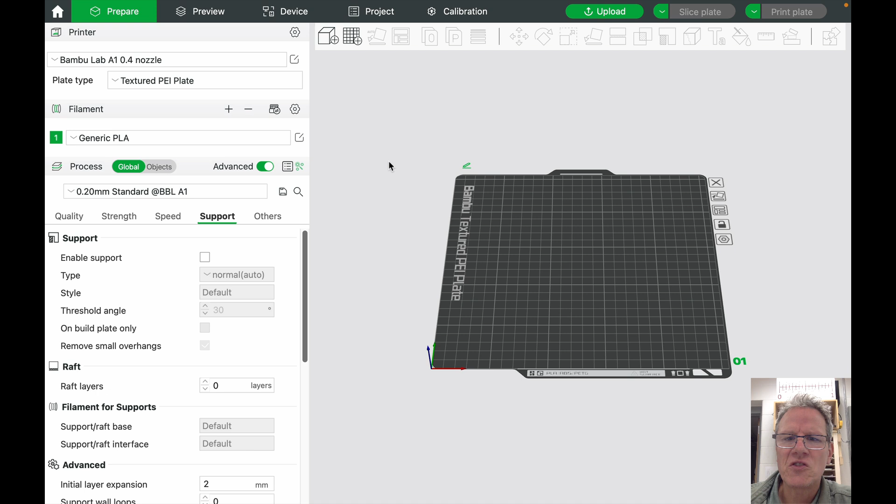When you first open Bambu Studio, you'll want to create a new project. This is called the build plate. It has the same size as the build plate on the 3D printer where your part is actually being built.

First thing I need to do is select the 3D printer I'm going to use. I'll choose the Bambu Lab A1.

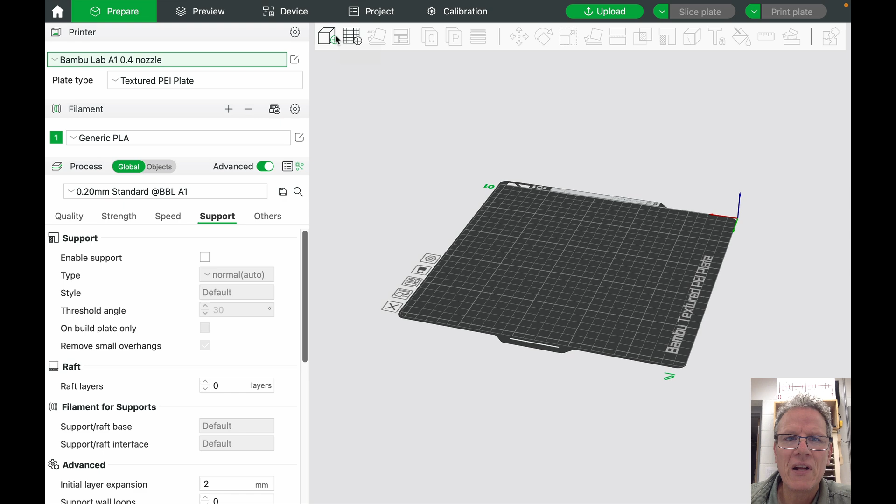Next, let's bring in our part that we created in our 3D design program. I'm going to hit this button here, the Add button, and look for my part. Now I have some options.

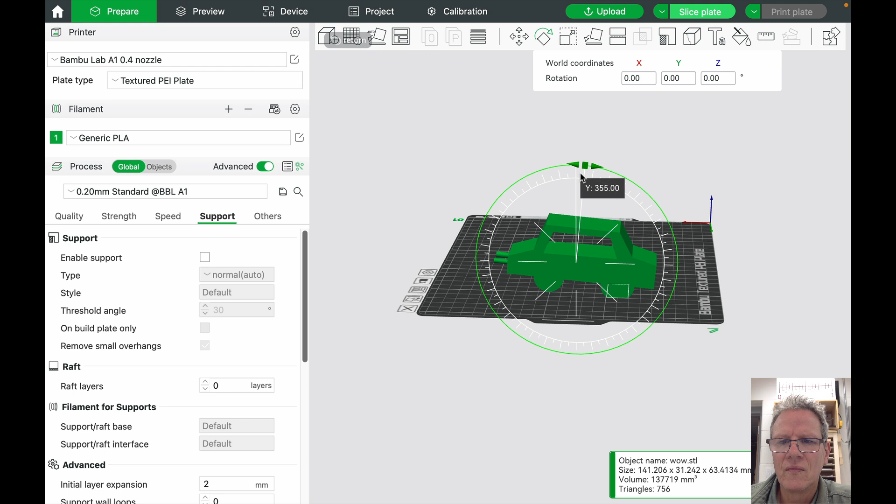I can move the part around the build plate if I want by selecting the Move command and pulling on one of the arrows. I can rotate the part. I can scale it by selecting the corner.

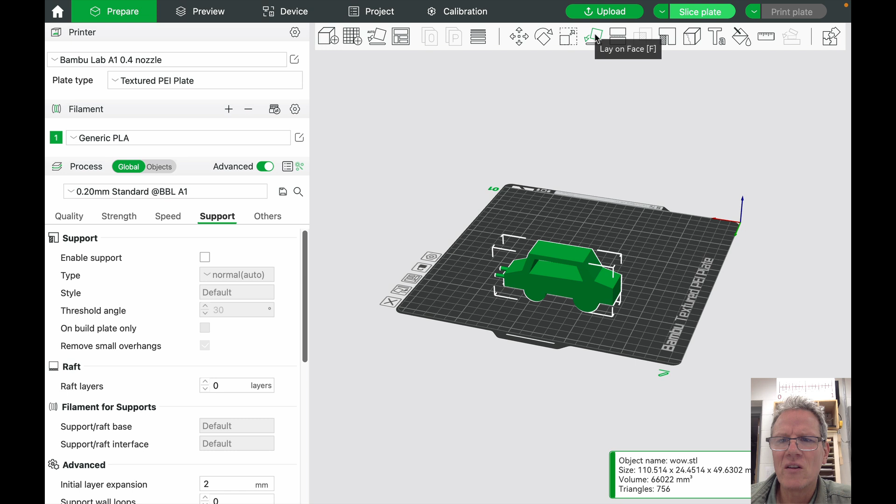Now, something very important, I need to determine which way this part is going to rest on the build plate. I'll select it, and this button here, Lay on Face, gives me options. I can lay it on its side, I can lay it on the end.

What really determines this is if you need support material or not. Here's what I mean by support material. Let's put it back this way.

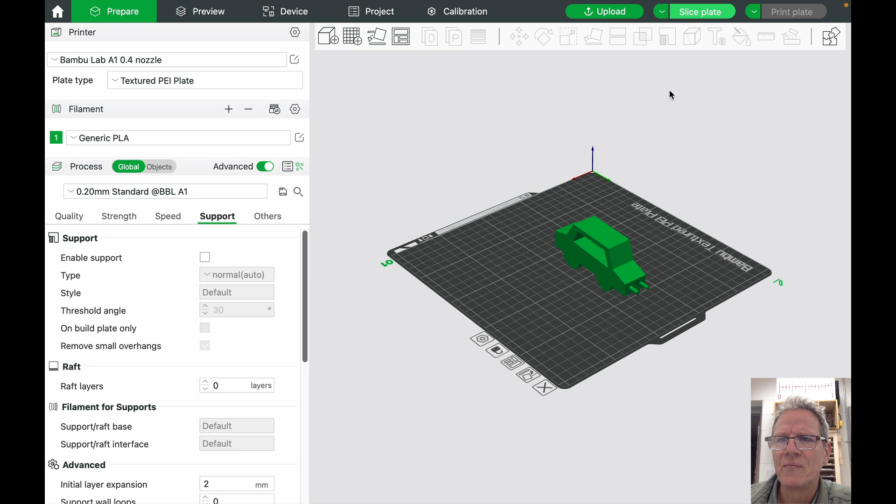And now let's slice this plate. What slicing does is it calculates all of the different layers that it takes to build this thing. The 3D printer uses layers, layer by layer, to slowly build this from bottom to top. So now I click Slice Plate.

Now I get this warning. It seems the object has floating regions. Please reorient the object and enable support generation.

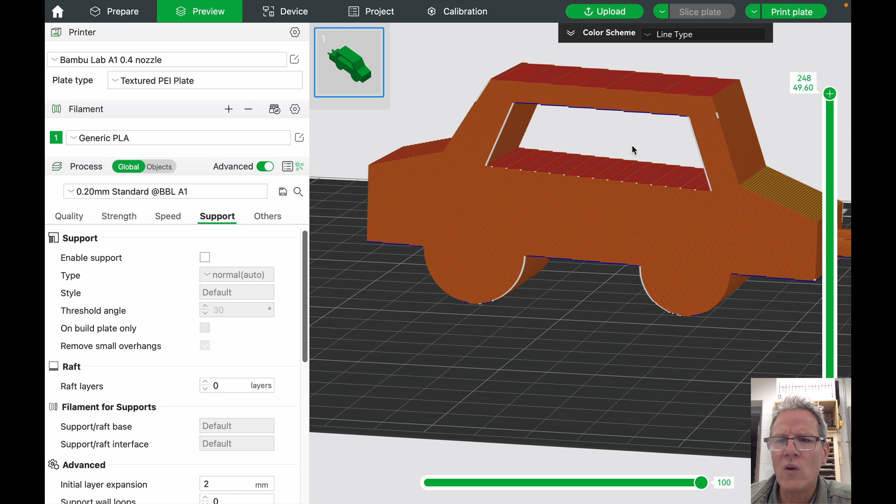Here's what that means. As the 3D printer is building this layer by layer, it can only build upon the layer underneath it. Once it gets up to here, it doesn't have anything underneath in this hole in the part that it can lay that first layer on. So you need something called support material.

I'm going to go over here. I have options: quality, strength, speed, support. Let's click support. Enable support. I check that, and now I have some options, normal or tree.

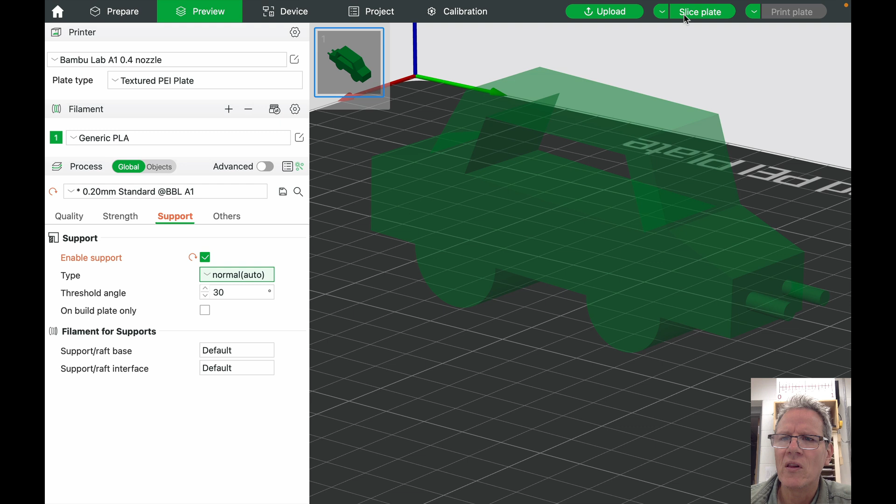Let's take a look at the difference. I'm going to select normal. I'm going to slice the plate. I didn't get any warning messages.

Let's collapse this. We'll talk about this in a moment. Now you can see everything in green is the support material. After the 3D print is done, this support material just easily breaks away. You can use your hands just to dig it out, or a scissors or something like that. That support material gives a 3D printer the ability to print in areas where there's typically nothing underneath.

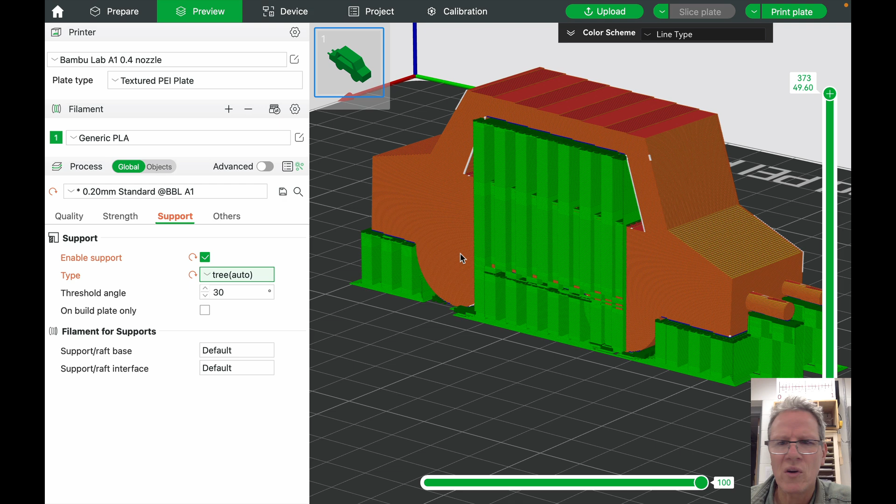Now let's look at the other type of support, the tree support. I'm going to slice plate again, and you can see sometimes it takes a moment. Let's collapse this again. So the tree support looks a little different. Tree support typically uses less filament material and is appropriate for certain types of prints. Something like this you just have to experiment with to determine which one is right for you, tree or normal.

And always choose auto.

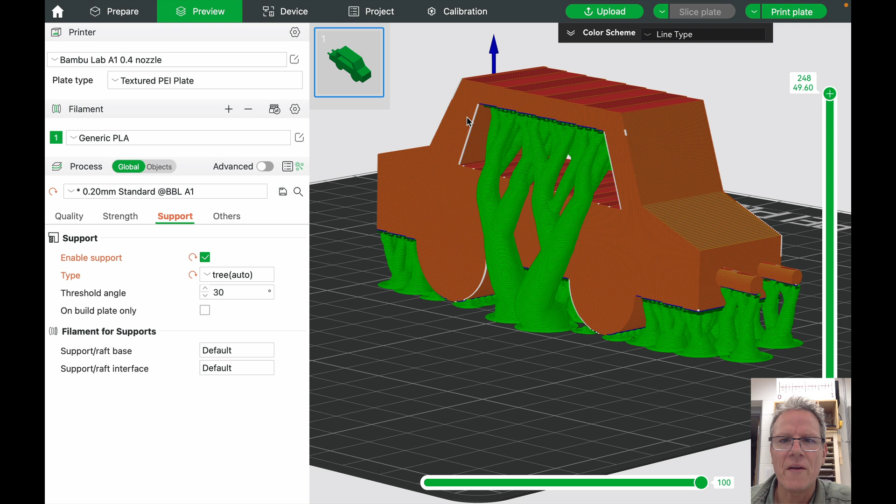All right, let's go back to prepare. I'm going to select this. I'm going to select Lay on Face. I'm going to choose the side face.

Now let's see what happens when we turn off the support. I'm going to slice it again. It says, warning, it seems the object has floating cantilever. Please reorient the object or enable support generation.

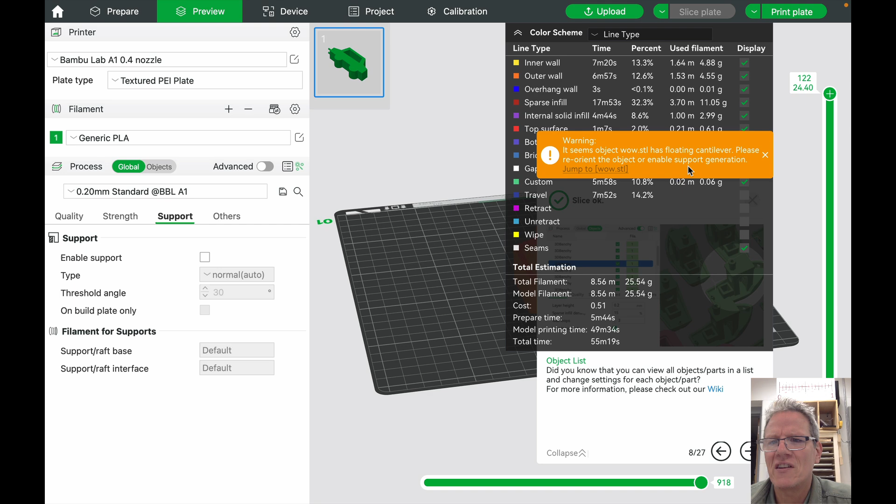So that means there's something here that needs support below it, and it's right in this area here. So let's enable support. I'm going to slice it again. Now you can see we're using a lot less support, but we don't need support anywhere else.

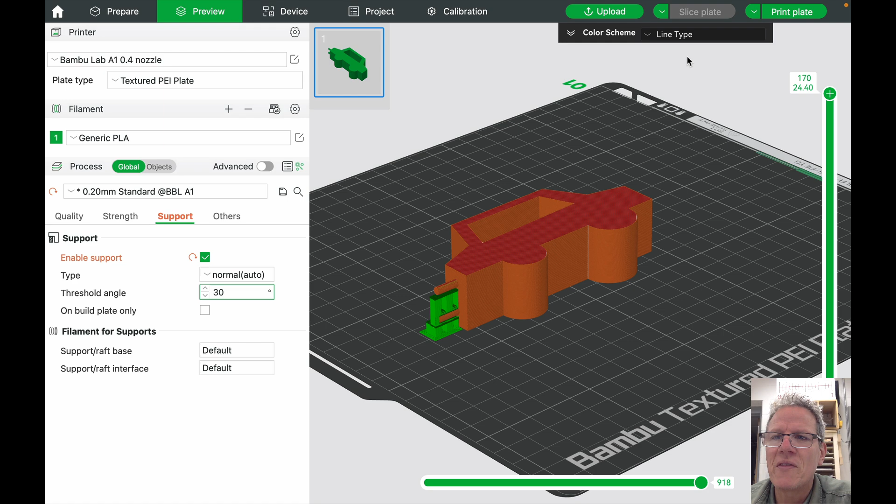Sometimes your part will need support, sometimes it doesn't, but that's what slicing virtually here shows. Now, my part is ready for the 3D printer.